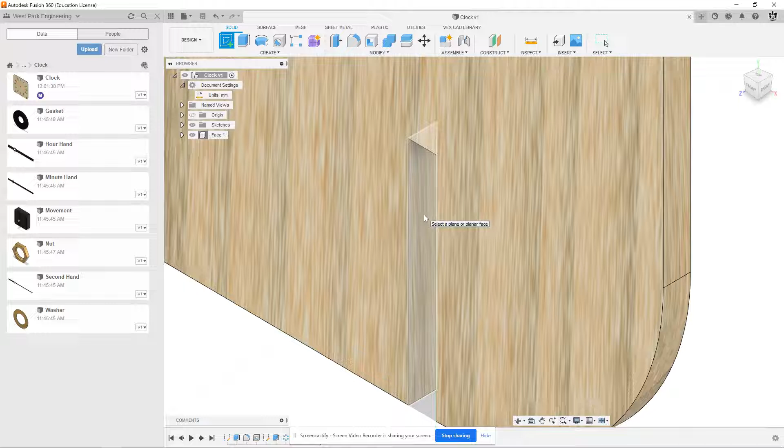First thing we're going to do is create a sketch. We'll go over here and click on this face. We're going in where we made the slot for the support, and we'll draw it and extrude it here. So I'm going to click there.

Now we're looking at this. We made our sketch, but the view it's giving us is outside, so that's not as useful. I'm going to click the right view. What we want to do is slice here. When you do slice, it cuts this thing open, and you can see we're looking at it cut open right where we want to do our sketching.

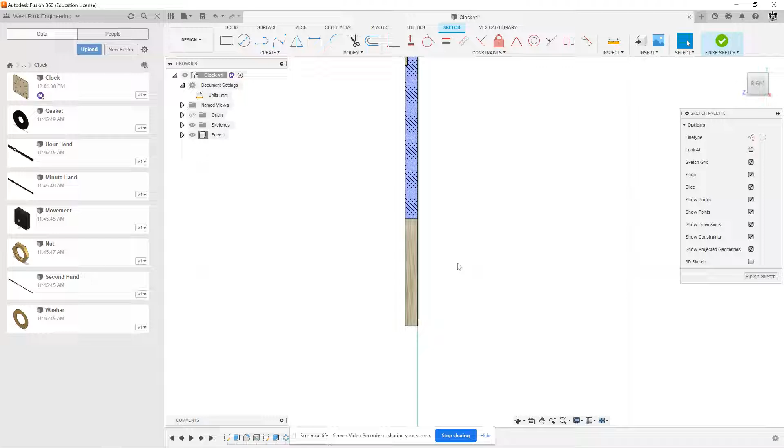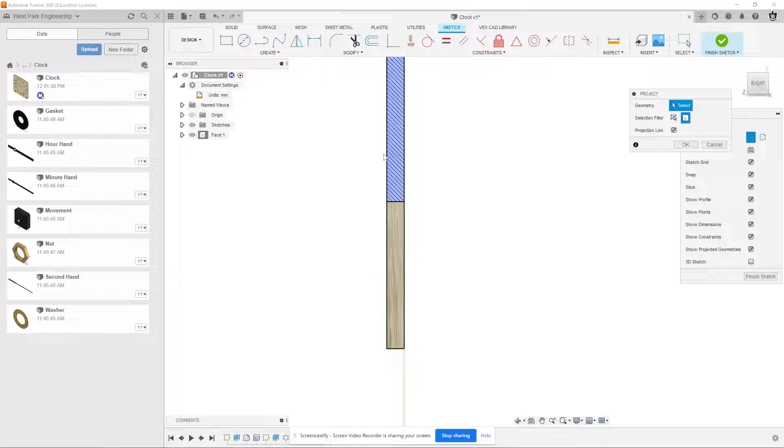Now there's some points in here that we need to reference for our sketch, so we want to bring them into our sketch. They're 3D points, and we want to bring them in as construction lines. In the sketch palette, I'm going to choose construction line. I'll go to the create menu, then project include, and do project. Where it says geometry, we'll choose selection filter bodies, because we want to pick the whole face of the clock, and projection link, leave that on, and click on that. This creates construction lines in your sketch that represent the shape of the face.

I'm going to hit OK. Now, to see the sketch, it's kind of hard because the 3D body is there, so I'm going to click here where it says face, click the eyeball tool, and uncheck that. Now I can see the shape. Down here is the slot we cut, and up here is the main part of the face.

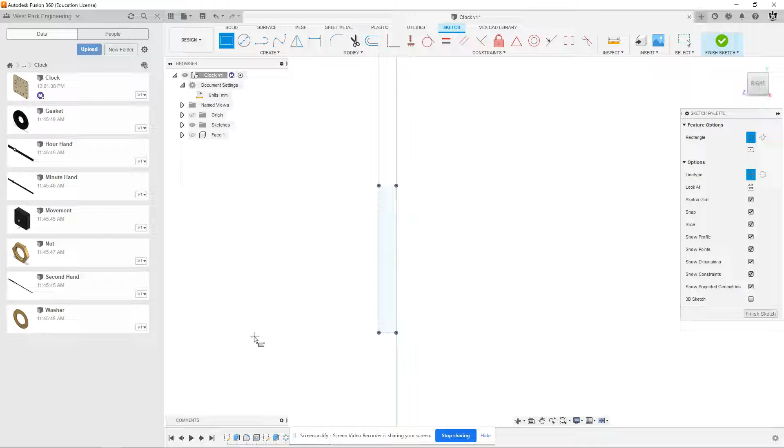So we're going to use a 2-point rectangle. I'm going to go over here on the bottom, not clicking here, just registering this point, and go over to the left and click. Then I'm going to go up here to the top right, and type in 50 for the height, hit tab, 50 for the width.

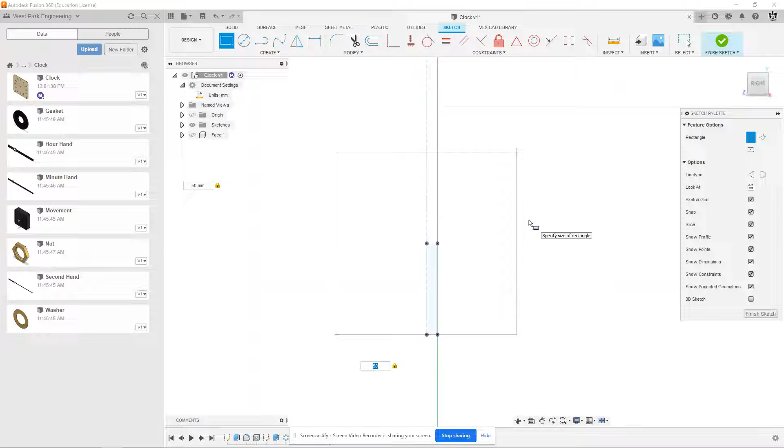I just realized I made a small mistake - I have to hit construction, because you can see it's going to make a construction line. I don't want that, so I need to turn that off. Anyway, if you hit enter, you should get a rectangle 50 by 50 on the bottom. Now the rectangle's not fully constrained, it needs a bit of work, but we'll take care of that.

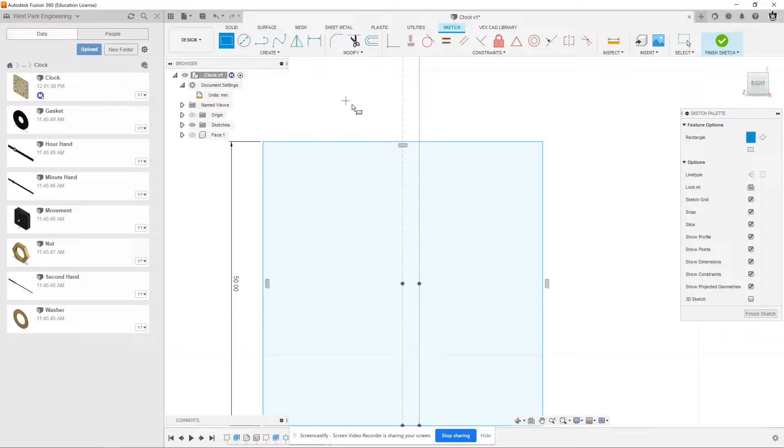So we want to make the slot in this - it needs a slot at the top to go into the face. So we're going to draw another rectangle, going right here down to this point. There's our other rectangle. Then here on the top, we need this to be open, so we're going to trim this away using the trim tool and click until there's nothing left.

So that's the shape we're going to make for this support. Now you can tell it's not fully constrained - it's even giving me warnings about constraints, so it needs some. What we really want is for this thing to be centered, with the same amount of material over here as over here. When we have that situation, we use an equal constraint.

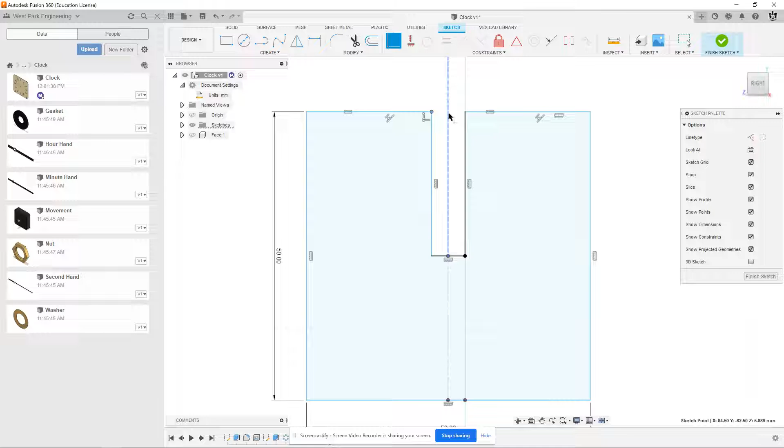So we're going to hit equal, hit the right side here and the left side here, and they'll center. Now this moved for some reason, not sure why. I want to use a coincident constraint, clicking this point and that line there. And we're looking pretty good now.

We only have 2 blue lines. Let's see what's going on. Down here on the bottom, I can drag this line down so it doesn't know to be coincident here. So I'm going to click coincident, that line, and that point. And then everything actually looks good now.

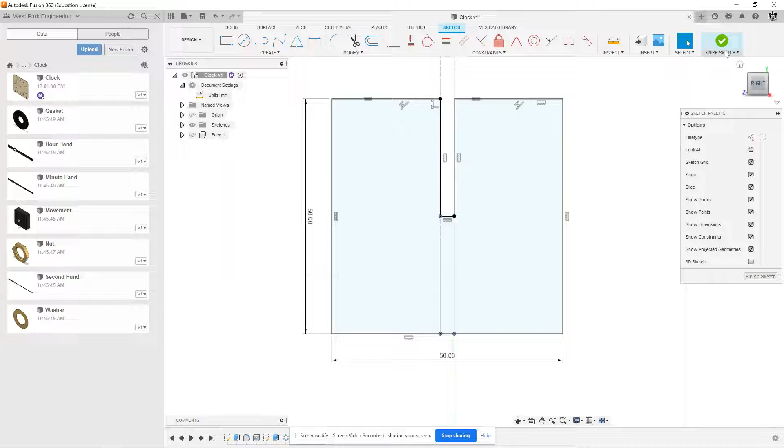So then what we're going to do is finish the sketch and go to our home view. I'm going to turn the face back on so you can see what's going on - we're making this little piece that fits into the slot. Now we're going to extrude this. There are 3 sections: click that rectangle, that rectangle, that rectangle.

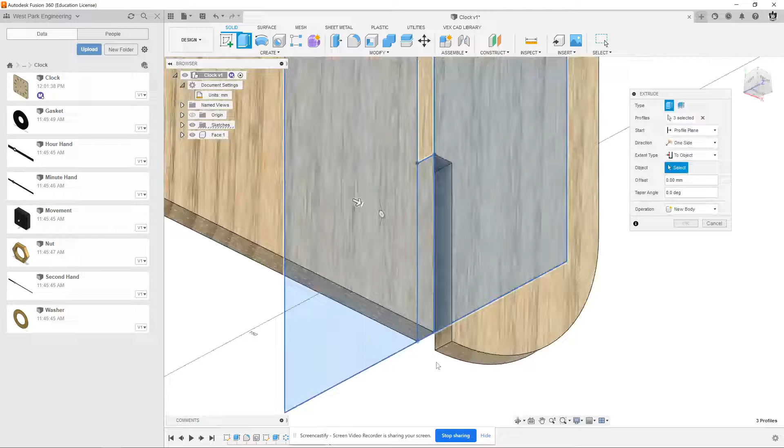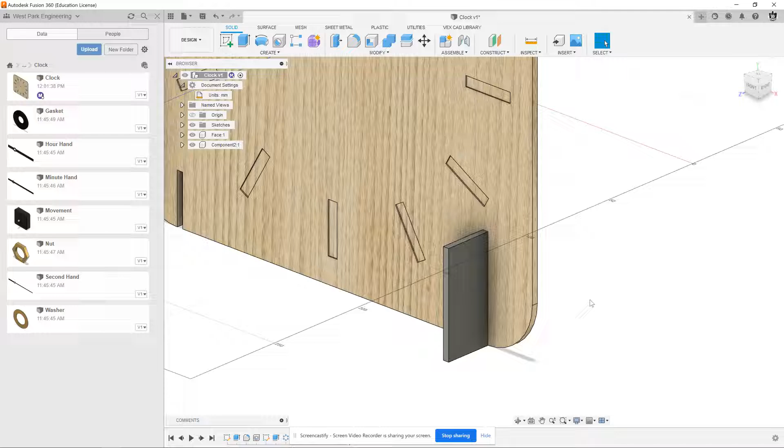We're going to change the extent type from distance to object. I'll twirl this around, and what I want to do is extrude to that surface. You can see it goes ahead. Now what it's trying to do is a join operation, making this part of the face, but when we make it on the laser cutter, it's going to be a separate piece. So we need to make this a new component. We'll hit new component and hit OK, and you'll see as soon as you hit OK, the piece is there.

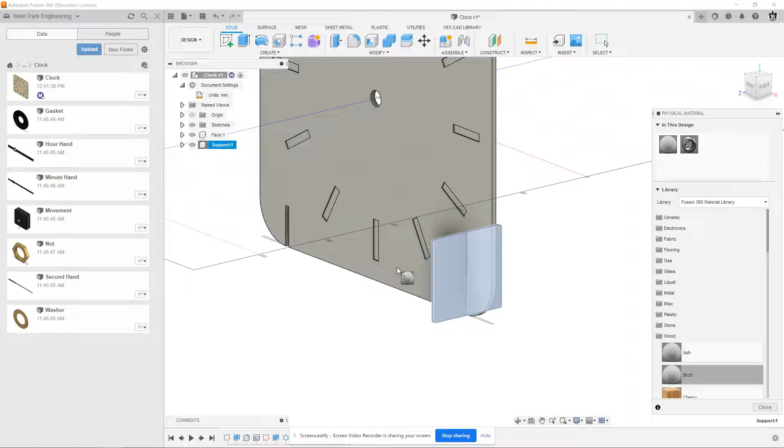Over here in the browser it'll say component 2. We're going to change the name of this - double click it, we'll call this the support. The other thing we need to do is give it a material, right? So let's give it a material and an appearance, and we're just going to do what we did before. We're going to use birch for our material, and then our appearance - oops, I clicked on the eyeball there - we're going to use the unfinished ash. There we go, okay, so now we've got our support in there.

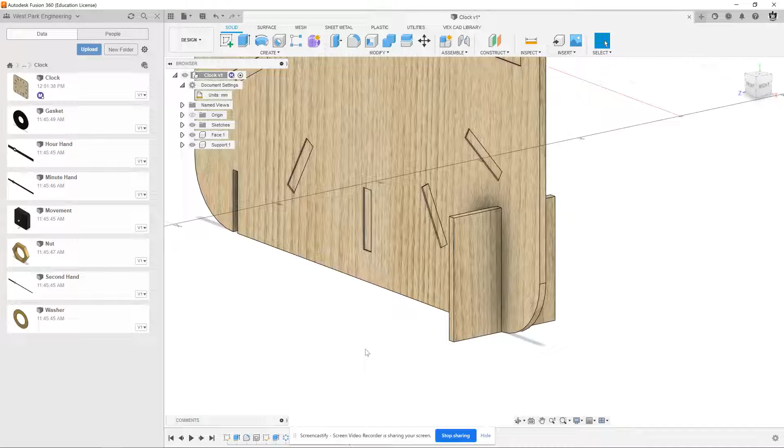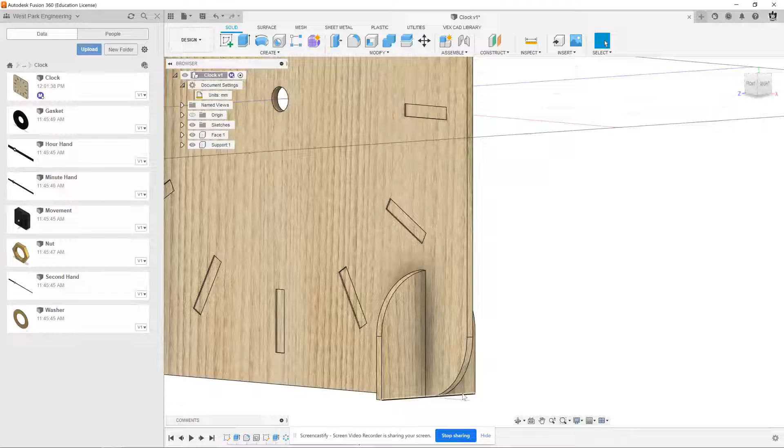Now if you look at it, it's got these sharp corners. It's a little clunky looking, in my opinion, not the prettiest thing I've ever made. So let's round these corners off on top. We'll do a fillet, and to keep the design consistent, we'll use the same radius that we did on the face. I'm going to click that edge, and I'm going to click this edge here. The radius I used before was 25, and you can see that gives it kind of a nice look, matches the other corners. We leave it flat on the bottom because that gives it a wider footprint and more support.

Okay, great, so now we've made this support. Let's check our assembly - let's grab it and drag it. Uh-oh, bad times. So we made these two pieces and we drew this one in the right place, but we didn't quite do the assembly stuff. So let's take care of that now.

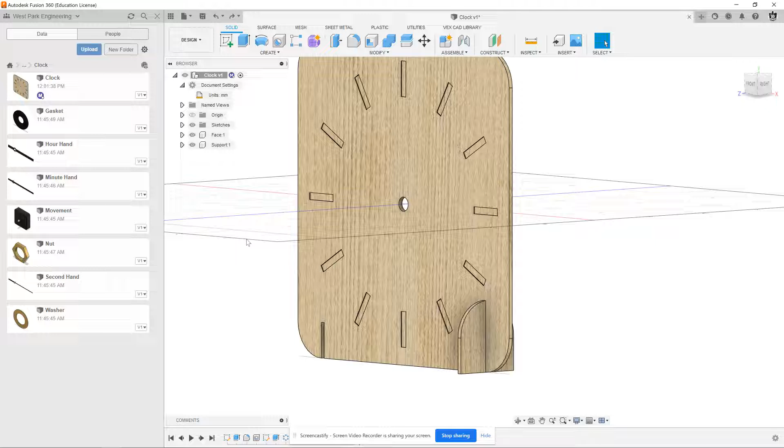So the face is like the main body, right? So we're going to right click on it and say ground on the face, then grab the face, make sure it doesn't move. And then the support, we want to make a joint there, but here's the deal - we're just going to make a rigid joint. Fusion has a thing so that if you've got something in the right place already, you don't have to go make a new joint. It'll just rigidly attach them.

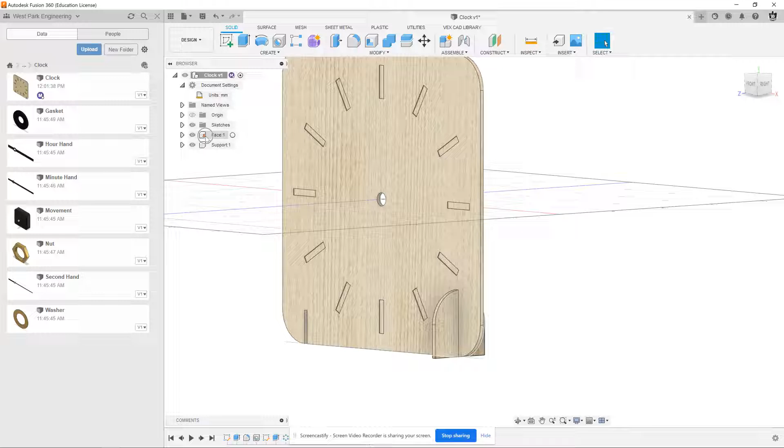So what I'm going to do is go over here in the browser list. I have face and support. I'm going to hold control and click on both, so they're both selected. And then if I right click, there's going to be an option to make a rigid group, and this will just apply a rigid joint to them. It'll give you an option here - you can just hit OK. And then we can click on it, and you can see if you drag these, they're stuck together.

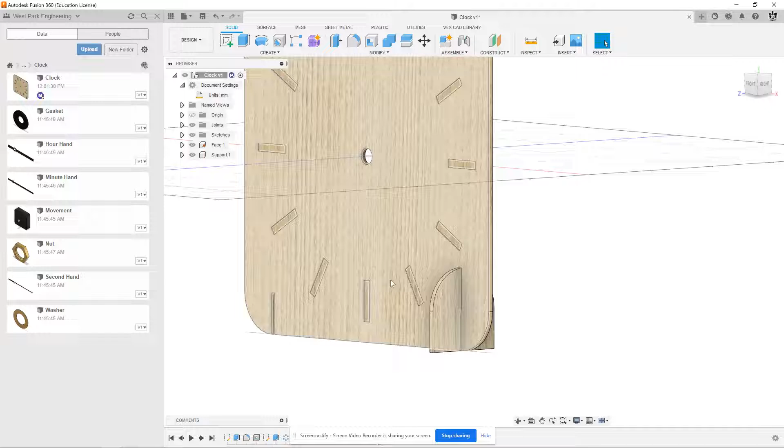Okay, so this is great - we got one support on here. We want to put the other one there, so we're just going to make a copy. Go over in the browser, find support, right click, move copy, create copy.

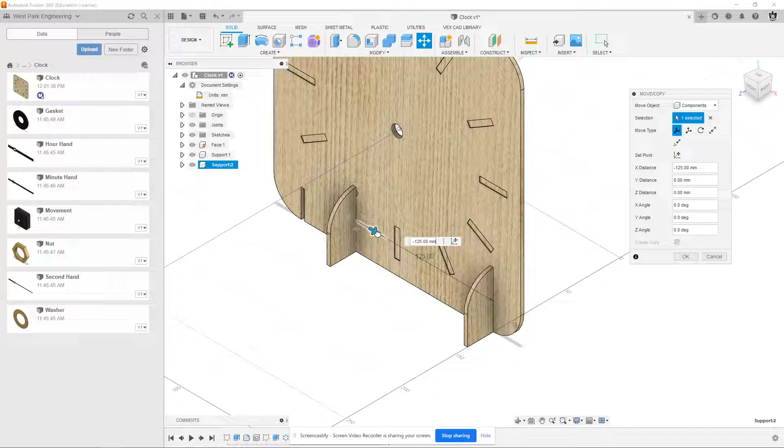I've got it in a different mode called point to point - you're going to want to be in free move mode. Make sure create copy is on, and then drag this over here. I'm not going to put it in exactly the right spot, it's hard to get there. I'm going to put it a little bit past the edge and then hit OK. So now I have a copy - you can see it says support 1 and support 2.

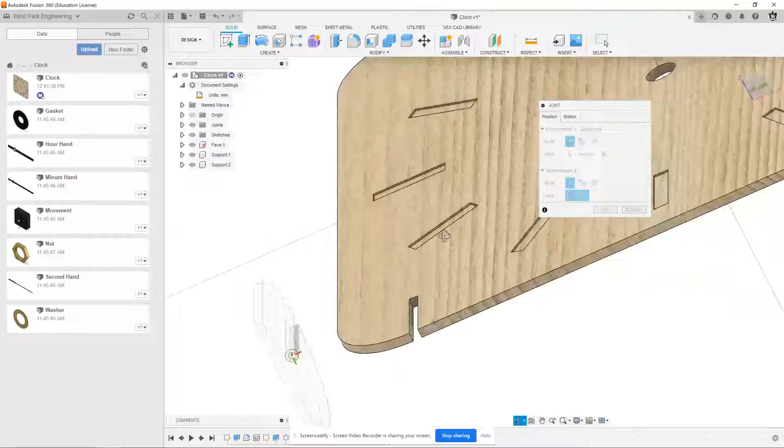And then I'm just going to joint these together. There's various ways to do this - I'm just going to use rigid joints. What I'm going to do is hit J for joint. I'm going to click the center of this bottom square here, boom. And then I'm going to go in here, rotate it over, and make it go to the center of that square. And if you hit OK, everything should go together.

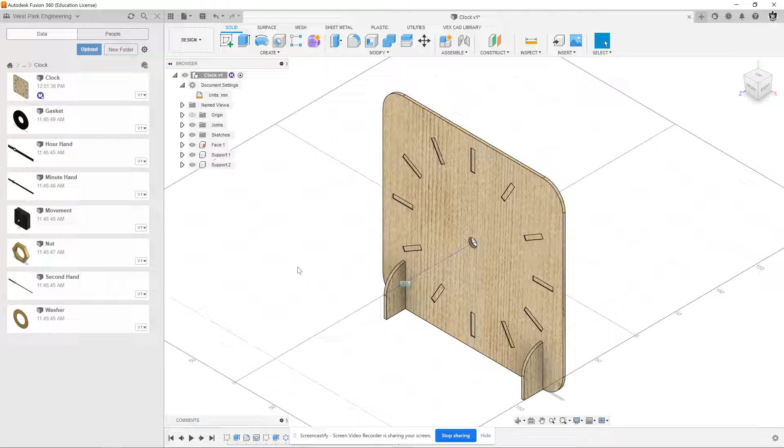And then we can grab these pieces - everything looks good, nothing moves. And we're actually done making new pieces on the clock. Go on to the next video, and I will show you how to install the movement and the hands and all the other pieces you need to have a finished clock. Good luck, have fun.